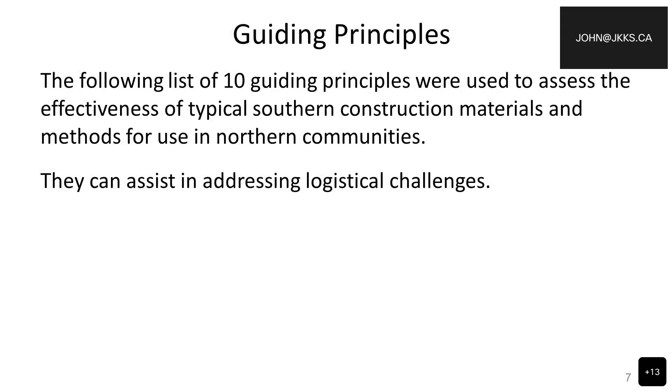There were a few guiding principles put together in a booklet titled Guiding Principles. They basically rationalize and assess some of the guiding principles that should be considered when we look at the overall, holistic, logistical challenges of Northern Guide and Northern Housing. Here's a list of the 10.

This is really just the point form. There are about 16 pages to the guiding principles in the booklet itself. As John alluded to, we try to keep the booklets in a reasonably small, easily readable format—not too much depth in the technical language, trying to make it a very easy read for just about anyone.

So we can see here some of the key points: durable and robust. What about a backup system? For example, when we talk about heating, engineers on the heating side might recommend a combo oil/wood furnace installation. Are things easily repairable? So the repairability factor. And are they tolerant to installation errors?

Again, when we talk about materials, is some flexibility in tolerance levels acceptable, and to what degree? Let's keep it simple—it can be performed even by local workers, shouldn't be too complex, and certainly should be low maintenance, with a view toward cost effectiveness. As I indicated earlier, flexible in design and adjustable to change.

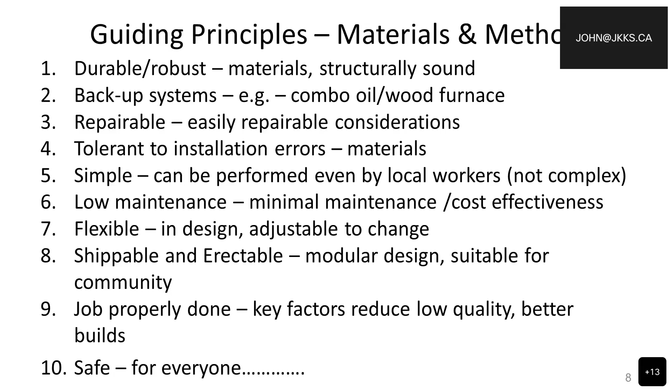Next, I'm going to show you a few of the covers, and I won't get into a lot of detail because each one is approximately, I'll say maybe the smaller ones, 10 up to 20 pages of information. We can see there's an overview booklet of Northern Ontario, which gets into the cultural background and a lot of the history of northern housing in Northern Ontario.

Here in the next one, booklet number 1, site planning and foundation—this particular booklet deals specifically with site planning and foundations. You can see there's a graphic representation of the northern part of the province of Ontario, tailored for remote Northern Ontario communities. If we look at booklet 2, it encompasses the issues of ventilation.

I like to talk about building science, and certainly one of the key factors is that houses need to breathe and need good ventilation. This booklet deals with the issues of ventilation—good ventilation systems for northern housing. The third booklet talks about heating systems. Each of these booklets is broken down into more of a system-based approach, uniformly spread across all the booklets being created for all the various regions.

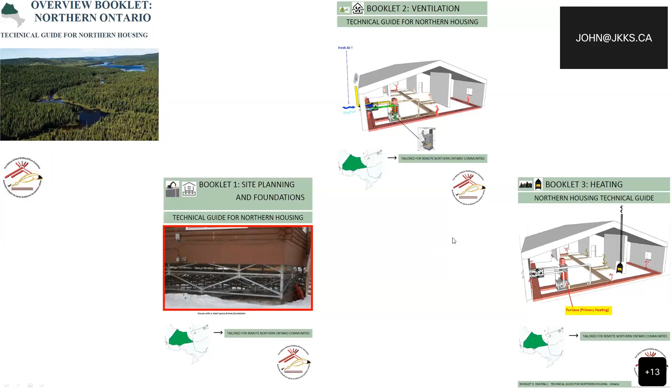I think we're going to have a great encyclopedia, so to speak, of all these booklets that can be taken apart individually, or as one big large collective for the area, or as one needs to read that particular area of interest for them.

Booklet 4 is on electrical, 5 is on fresh water, 6 is on wastewater, and 7 is on walls, roofs, and floors. Booklet 8 is on windows and doors, 9 is on structure, 10 is on acoustics, and 11 is on fire safety.

What you will find is uniformity no matter what particular region you want to look at, we try to keep these in sort of the same format and system. Again, these are simply just the cover pages of the particular booklets, and there's a lot of detailed information contained within each.

In the past, I did a short mini series of webinars talking about each one of these. For example, I could do a whole session on just structures alone, or just windows and doors. These are all very important, good information put together by architects, engineers, and a panel of experts in the field looking to create these guides for better builds for northern housing.

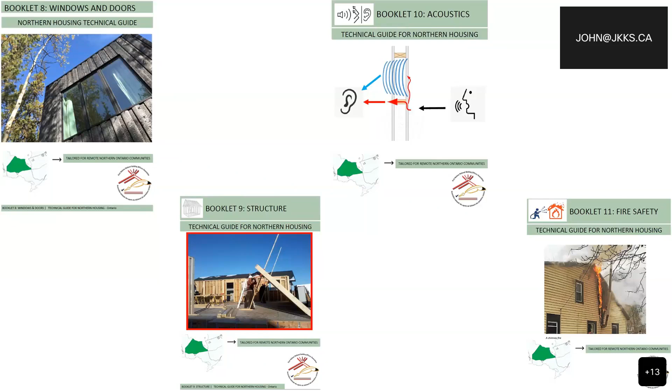A couple of the other booklets that John was talking about also is the introduction booklet, a technical guide for northern housing. This provides a more globalistic overview, from coast to coast to coast, talking about the guides, how to use them, and some of the problems and issues facing northern housing.

Again, we saw earlier those 10 basic principles, and this is where that document and information comes from. I basically extracted it and simplified it, but the guiding principles document gets into a lot more detailed information about the guiding principles for northern housing, and what was behind the idea of the guiding principles.

Here's an example of the table of contents of the introduction booklet. On this slide we can see the main topics: the introduction, the objectives, overview of the booklets, the audience, the principles, and on and on.

It talks about the many Norths, climate zones, the housing design, and going down to the second section, governing structures, authorities having jurisdiction, bylaws, inspections, and so on, plus project costs and life cycle issues.

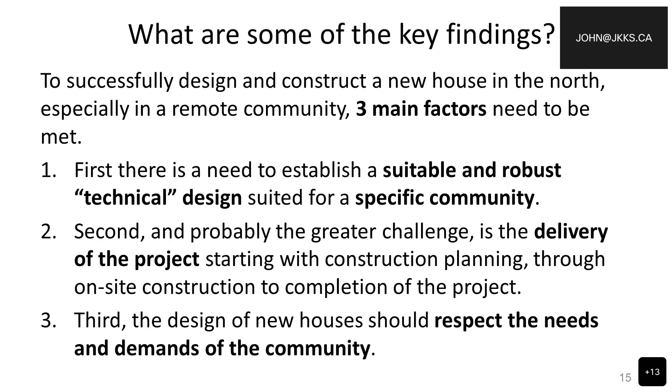So, looking back and looking forward. In the past few years, regional technical construction documents have been produced in various forms and complexity. The development and collection of these guides differ from those regional documents and is unique in the following three ways.

One, the technical guide provides user-friendly illustrated booklets, as John indicated, outlining best practices for building solutions for house construction. The guides seek to cover all northern and remote regions, including the Arctic and subarctic nations and Inuit Nunangat regions. To cover this vast area, 14 overview booklets of the subregions have been developed to show the distinct challenges within each subregion, and 11 technical booklets cover the house design and construction process. So you can see there's quite a collection of information we put together.

The second key point here: the technical guide appendix also presents community-based house designs developed from consulting and engaging with Indigenous communities. Many of these, a team of Indigenous architects completed the consultations and produced these house designs that captured the direct housing needs for First Nation communities. These architects worked with the community in developing some really nice house designs that suit the community. The Inuit house designs presented are as-built designs developed over the years with ongoing consultation with architectural teams—some of these have been built, and some are nice designs that haven't been built.

Here are some examples—some of these are from previous technical guides that were put together, just to give you some general images and ideas. Examples of the Northern Boreal First Nation subregions, or another one, examples of the Inuit Nunangat subregions. Some graphics, some plans, and what I really like is that they also break it down into some of the plans and details.

These are important things when we start thinking about good design and good development. It's not simply a sketch or something thought out that's been used time after time, but designs that have been specifically developed by architects and engineers with a lot of thought put into how to build better homes in the north.

If we go back to example two, that's creating a bit of a bigger discussion for us because we like the design for accessibility. If you see the front door, if somebody needs a ramp, the ramp could actually swing around and be completed under the carport, so there's always protection for the ramp.

As we know, especially in the north, it's a challenge how you build accessibility ramps when you're dealing with permafrost and climate weather, and you can't even put a metal one up there because of the safety issues of the metal, the cold, and slipping.

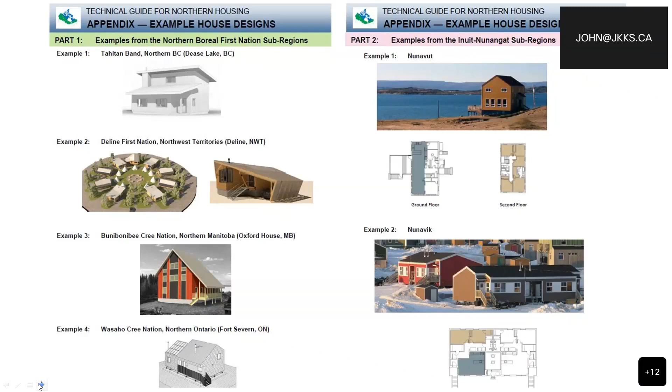There's lots of nice information and details. Summarizing, Canada has many norths, especially when it comes to constructing new homes. Often construction guidelines for new homes were very generalized, and there's not always been a successful house build in a good number of communities. Most often they did not address the unique characteristics of a particular northern region, including its climate, soil conditions, or varying building practices that should have been followed for that area. The overview and technical booklets were designed to specifically take into account the northernness, including the diversity of communities across the landscape of northern Canada.

Again, I want to thank you. I apologize for not getting into too much detail, because each of these booklets I could have spent a full webinar on, just talking about site planning and foundations specifically for Northern Ontario versus Northern BC. So there's a lot of information there, and it's really about getting the word out that you'll find these technical guides valuable for your particular area, or simply for your reference library. Again, thank you everyone for listening.

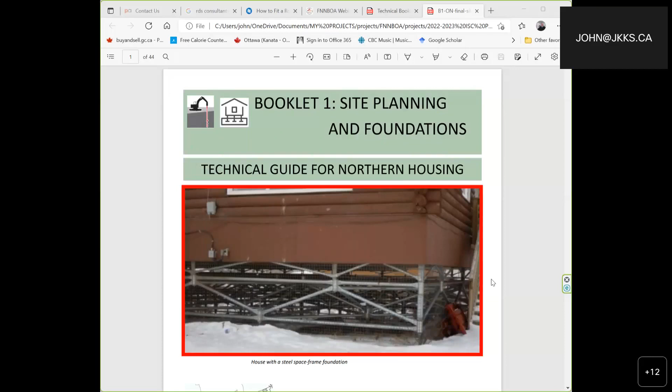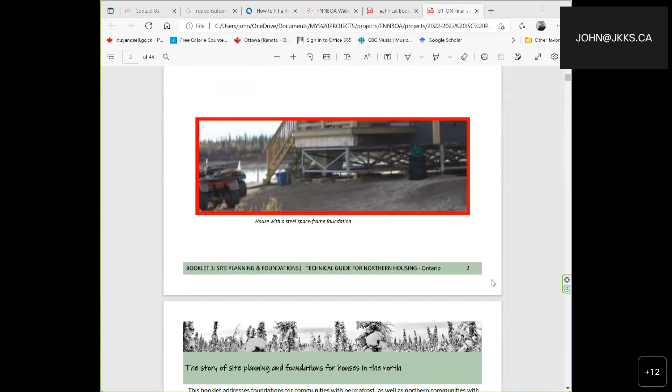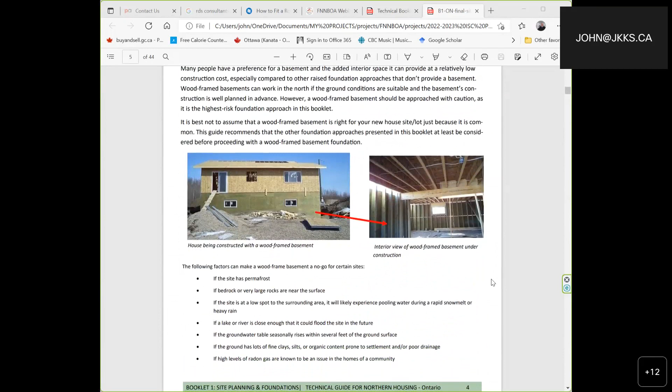And so you can see the amount of detail they go into. For example, here we're talking about some of the old foundations, how they were just put on a house with a wooden cribbing foundation. Here we talk about housing being built with a wood frame basement and interior walls. So we go through all this detail.

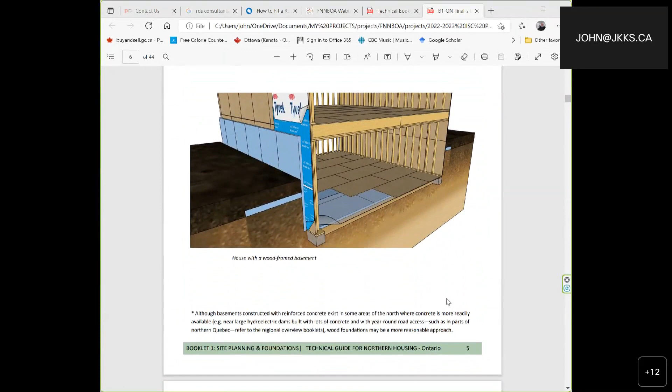But what I like about it is we also provide the specs on the planning and different types of foundations. So here we're looking at a house with a wood frame basement, setting out the design factors for them as well. So what are the criteria? Let's go down and we'll list those below grade.

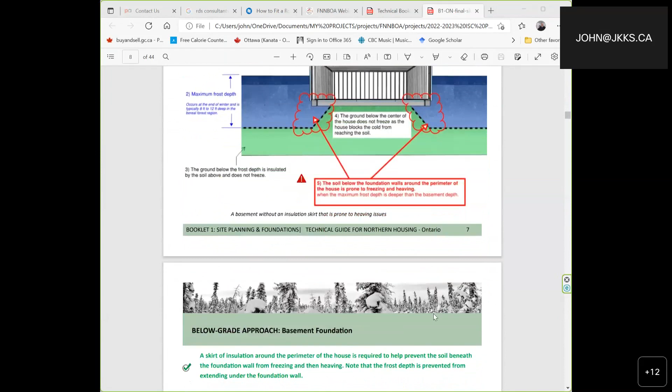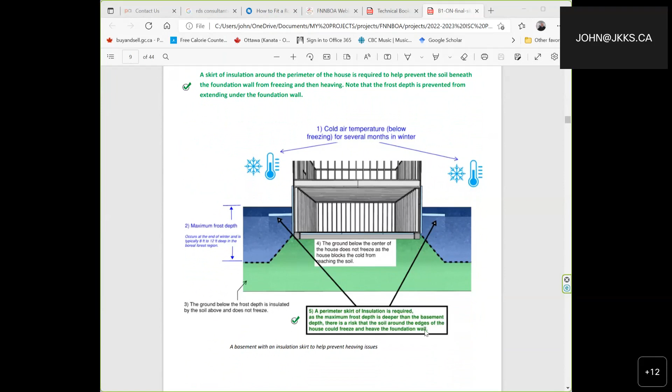So these are all drawings that we had done for our requirement for the guide. You can sort of see here, explaining below grade, the temperature changes, freezing for several months — totally different. We talk about the frost depth, which is a big issue for the north. So we go into details that you would not get in the building code, for example, but we talk about it here.

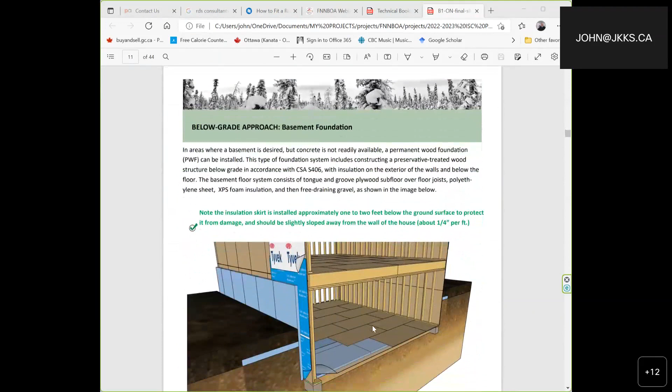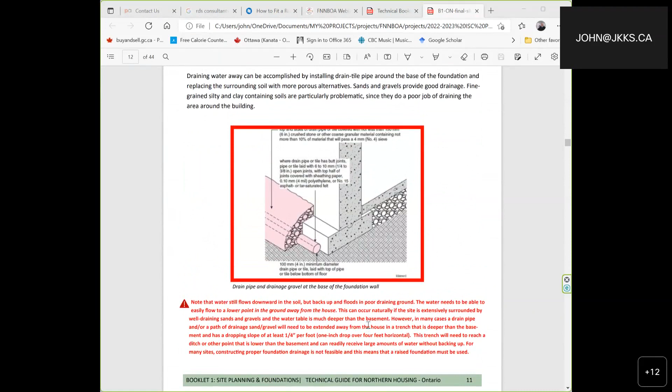Again, I'm just going through here. So here we talk about drain pipes and drainage, gravel, the basement, for foundations, installations of weeping tiles and installing drainage pipes, and how to do it in northern climates. So again, we're specifically talking about the north. It just gives you a few ideas.

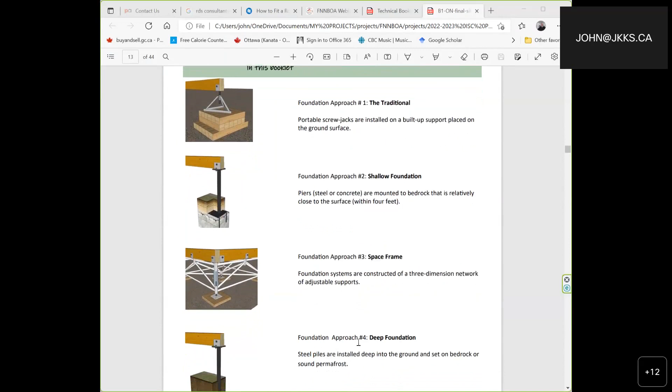So this here, I'm going to whip through without making everybody sick. Let me see. So this one is 44 pages in length, so that's one of the shorter ones. Yeah, one of the shorter ones. But you can sort of see the detail that we put in.

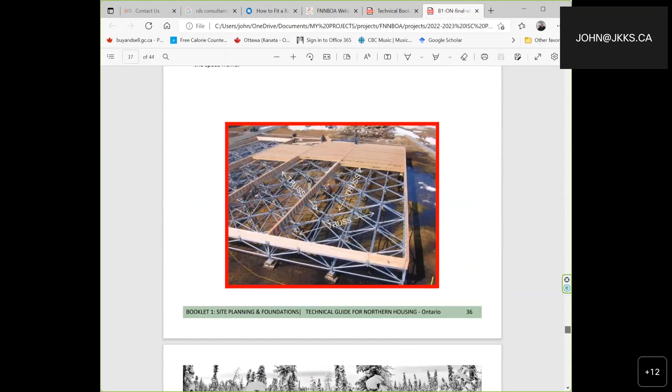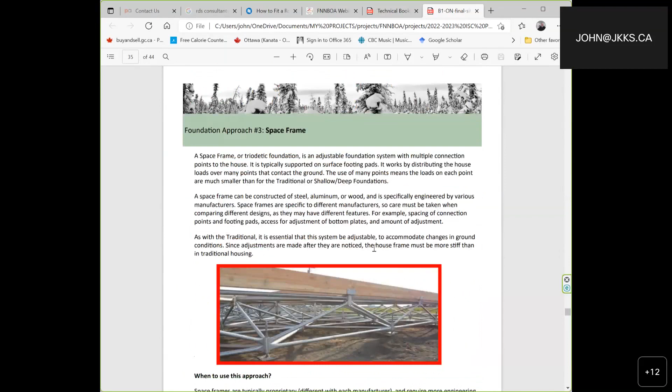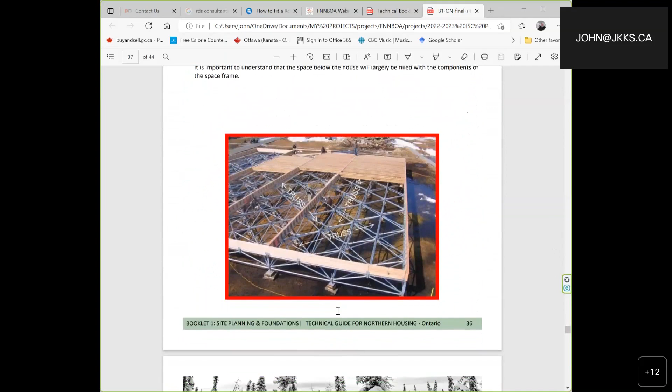So this one here is talking about - let me back up here - space frames, right? That was obviously a big discussion in our consultations, and we talk about space frame foundations for the north and how to set them up, how they should be used, the base that it should be on, and so we set up this whole framework. Again, why? Because in our consultations in the north, this was always one of the big discussions, how to set up a space frame. So, and we also talk about pile foundations, right?

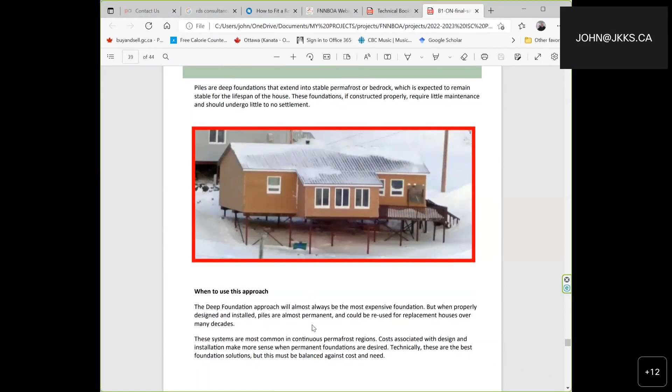Again, what is the pile foundation? We go into detail. It's a wonderful sketch that was done for us. And so here we give an example of what it looks like and when it should be used in terms of climate and the type of ground. So that just gives you some ideas.

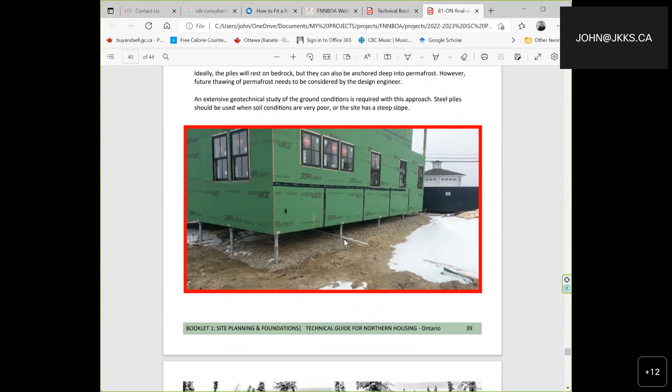Again, there's another pile foundation, and we talk about the geotechnical studies, ground conditions, soil testing. We spend a lot of time talking about proper planning before you build. But here's an example again of a pile foundation.

So that was just the different deep foundations. And again, we kept it short and sweet because we know people don't like to read, but if you want to read, we also provide all the supporting documents here. So all the CSA standards. We talk about a report by Johnson, permafrost and foundations, and some other draft technical guides for adapting houses in climate and Canadian permafrost terrain. And so we substantiate our findings by providing the information here, which people can easily access.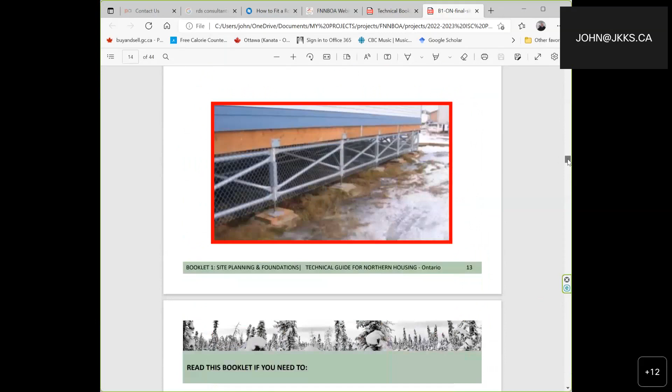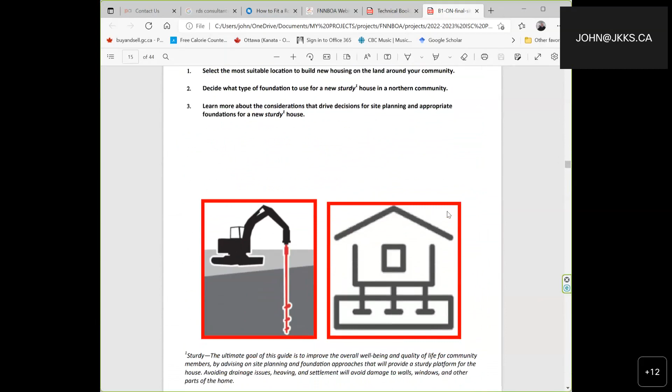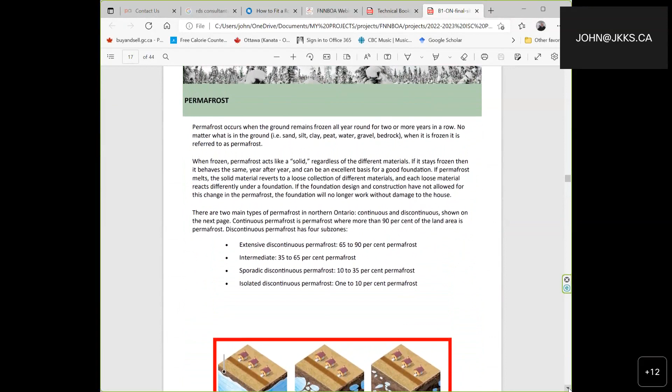So just there you go. Just a comment there, John. I think the other important part I like about the booklets and the documents, it's not like trying to pick up the building code and try to figure out what you need to do. I look at building codes as the legal language of how to build, whereas these documents, as we can see, as John is indicating, use a lot of simple language, some illustrations. And by the way, this is what a house in the community looks like that's actually using it. So some very, very good examples, very well put together.

Yeah. So again, we've had a big discussion, so I'll just highlight again permafrost, right? We talk about continuous and discontinuous permafrost and how that impacts construction practices. And knowing these conditions, well, how do you build in those conditions? So we want to focus on that. That's why our technical guide specifically targets each region. Permafrost in Northern Ontario will be much different than another region. So we also want to highlight the difference. What's good for Northern Ontario may not necessarily be the case for other regions because of the type of permafrost.

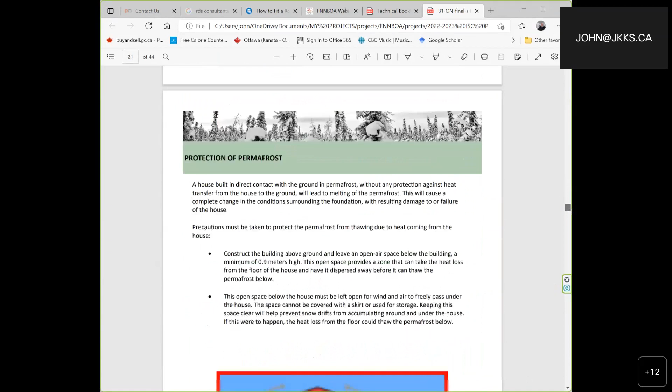So again, our guide is based on this type of information as well as climate and other factors that impact construction practices. Just give me another idea here. This will be available on our website. We'll send a note out to everybody. While it's going back and forth, our web guy is trying to figure out how to post these large documents and make them available. So once that's done, I will send out a notice to everybody to go ahead and download it. It'll be very important information for everybody to use.

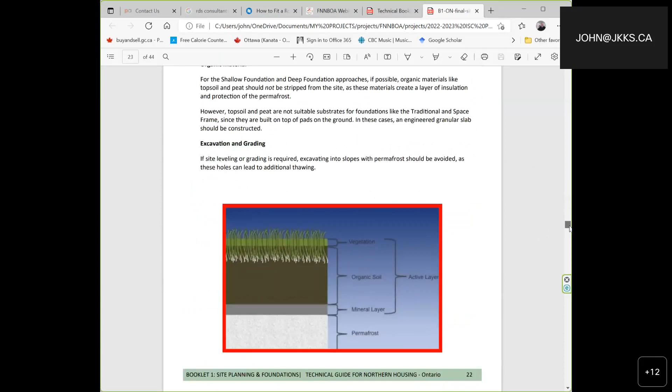So I just, there we go, grade. There we go, importance of moving the water away from the house, right?

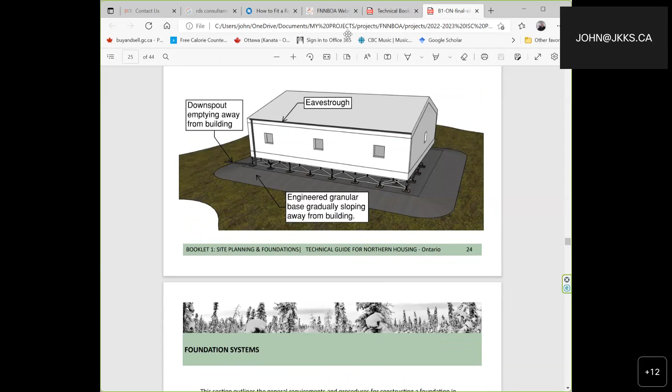No problem. So, I think Laurel, are you still there? I think Laurel had a question or a hand raised. Go ahead. I gotta stop sharing here because I can't - oh, there you go, stop sharing. Well, go ahead, Laurel. I did have my hand raised, but you just answered the question. Okay, thank you. Okay, Laurel. Yeah, how to make everything available? Hi, can you? Yes, that you answered. You just.

Okay, kind of breaking up, but I think we got the idea. So we hope to have it available - that's why I had my hand up. I was wondering where and when they would be available.

Yeah, so the Northern Ontario one is available. The other regions, we have to go back for additional funding and we'll build on those going forward. Once we get the additional funding for other areas, it won't be as much of a challenge, since the first one or two were the most difficult because of all the research. Now we have the template and the basis so we can finish off the others. But that said, there's a lot of information in the northern one which people can use.